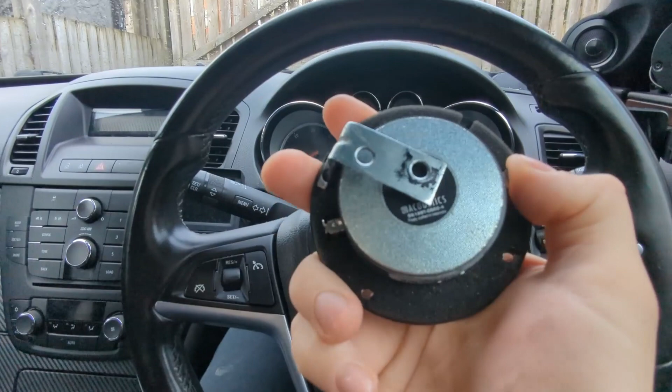What I want to do with this - this is a typical home audio tweeter. It's an SB Acoustics, the SB19. This tweeter costs about 15, 20, 25 pounds. It's a super cheap tweeter, but it's good. According to the data sheet, the response on axis directly goes all the way up to 30K. It goes up to 20K flat, and after 20 kind of drops a little bit.

When I did these measurements of the Alpine status tweeters, and I'm going to show you probably in the response, that they drop off as if they would have a 17K low pass filter.

And the purpose of this experiment is I'm going to install them like this, just temporary. So this is just literally with brackets into the window bolt, and I'm going to have exactly the same for the other side. I just need to remove that little triangle and put it there.

And the purpose of this is - I know that my hearing goes up to like 17K or something. Above that, I don't hear much. However, I want to see if there would be a difference if I would have that top end extension.

So I will let the status drivers play as high as they play, and I'm gonna cross these probably at something like 17K. It is extremely high, 17K up to wherever they measure, probably 20, 25K or whatever. And for me it's just to see if I can hear the difference with the extended top end that is above like 17K, or I won't be able to tell the difference while playing music.

That's a bit dark, so that's the response, and you can see it has all the extension up to 20K because this microphone measures only up to 20K. I would need to get an XLR microphone if you want to measure higher.

So this is the left one, and this is the right one, which is here. So you can see everything is fine. I think on the right one, this dip might be a reflection from the glass that's coming there. Maybe, but it doesn't really matter. So let me remove the status.

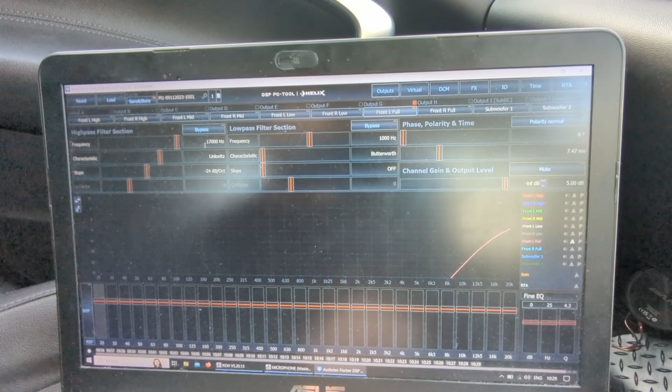Okay, so these are SB, and both of them play all the way up to 20K. The level drops a bit, but it's fine. When I cross them, where did I cross them? I crossed them at 17K, here, 17,000 hertz. When you cross them like this, you get left and right.

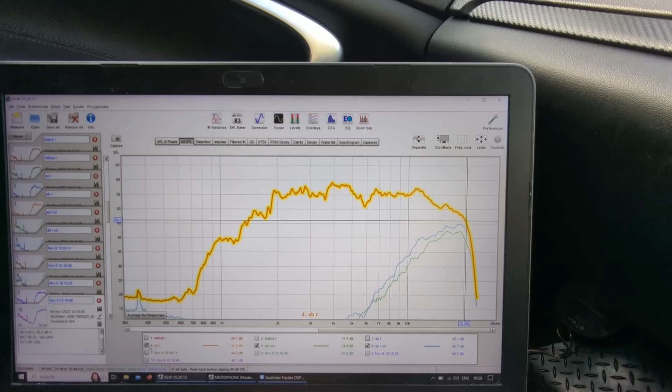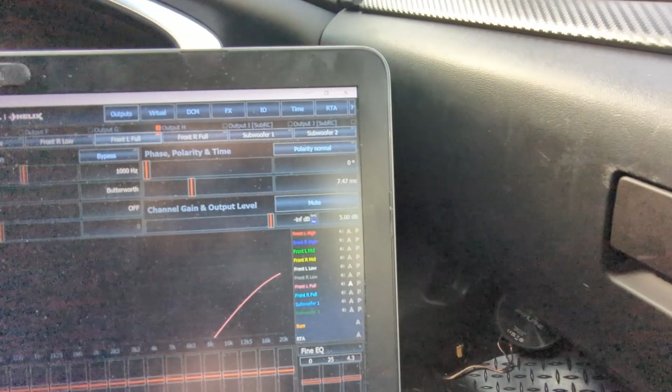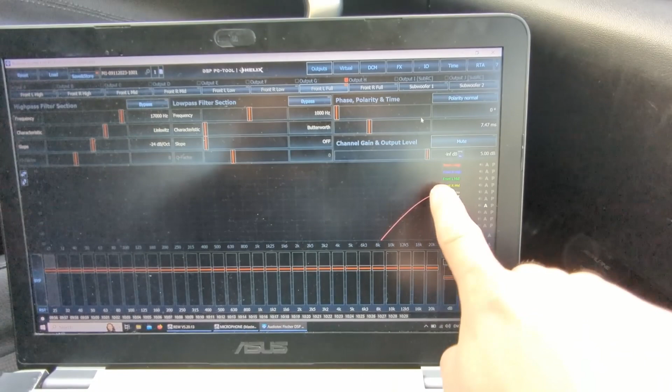So now obviously the level is a bit too low, so I had to boost the level, and I did left and right. So this is with the boosted levels. Here you can see one I boosted 5 dB and the other one something. So even with these massive 5 dB boosts, it's still fine because it's very high frequencies, and the crossover cuts a lot of energy anyway, so it's not a problem at all, and it's just for testing anyway.

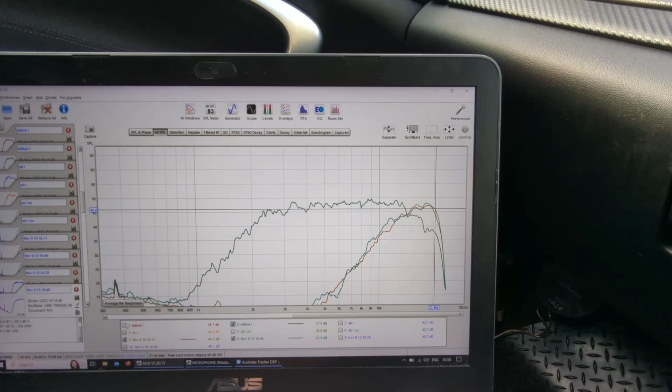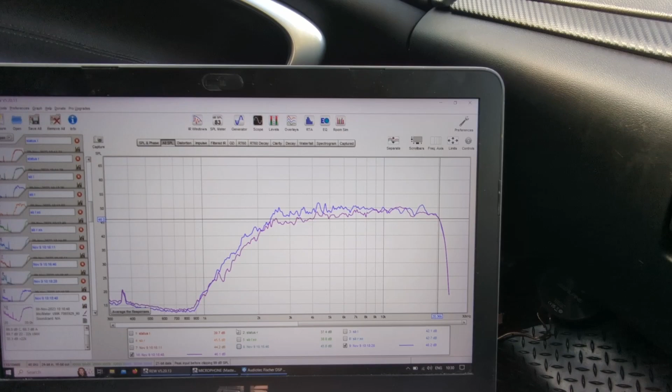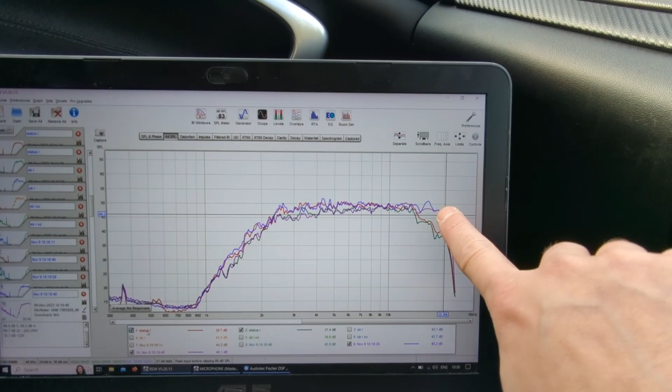And I ended up with this, so the left and right, and now status left and right. So it was like this, and basically I filled up the top end, and when they sum after the time alignment left, and I lost my mouse, right, there we go. So basically I have all the way up to 20K. Before I had this, they were falling off, and now I have it all the way up. This is a little bit of a peak, but it doesn't really matter. But basically, measurement wise, I have all the way up to 20K.

Now the question is, what did I hear, and did I hear a big difference? No.

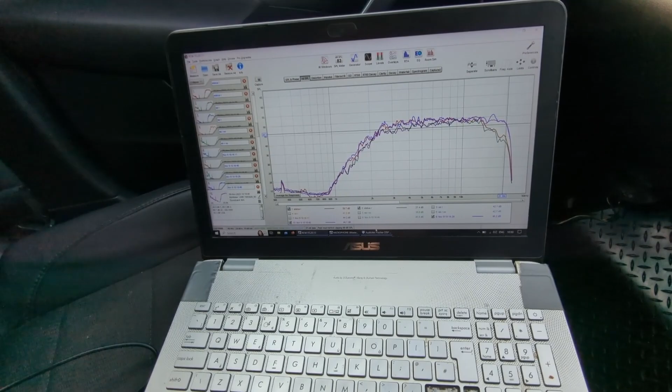Basically on music, while music was playing, let me show you how I toggle them. If you go to Helix, the Helix DSP has a very cool software. You have all these channels, and these channels are represented here.

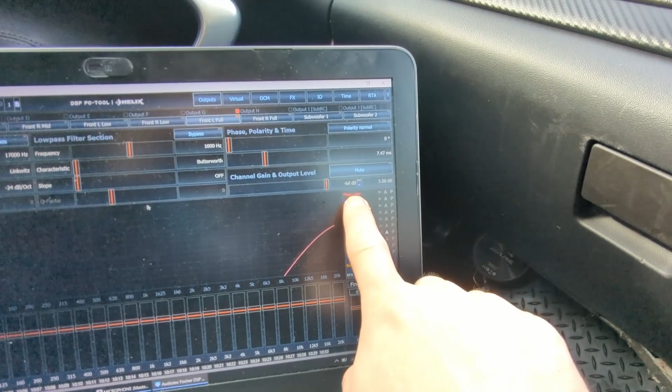For me, the channels were 7 and 8. And if I press the number 7, it doesn't mute now, there we go, 7. This one 7, sorry, not the F, but these 7 and 8. So 7, let me remove it. 7, see, mute, unmute, 8, mute, unmute. And if I press them together, 7 and 8 mute, 7 and 8 unmute, mute, unmute.

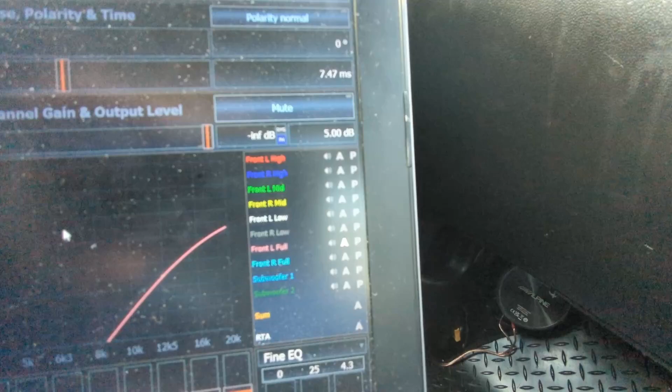So basically, this is how I was checking. I was basically playing music and just clicking those two, mute and unmute, closing my eyes and everything like that. And on music, I personally didn't hear a difference.

The only difference that I was able to hear— this is not my cat, this is my neighbor's cat.

The only difference I was able to hear is while playing pink noise and white noise. Then the difference is substantial and is good.

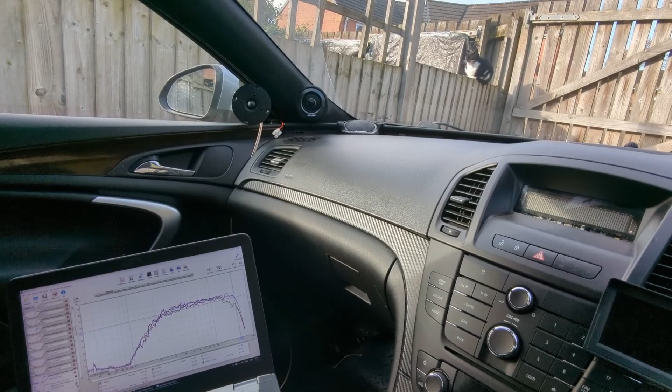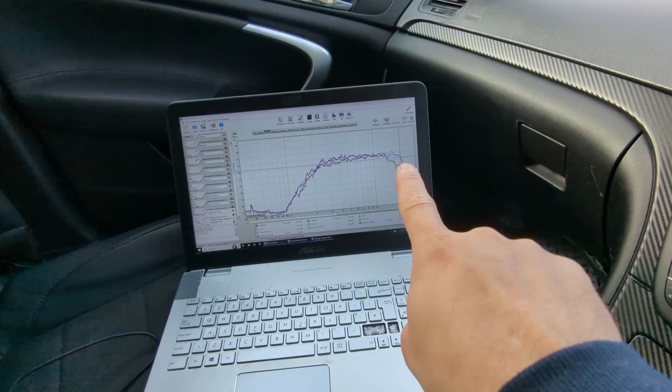But I did hear a difference playing pink noise and white noise. But me personally, with my ears and with my system, I didn't hear a difference on music.

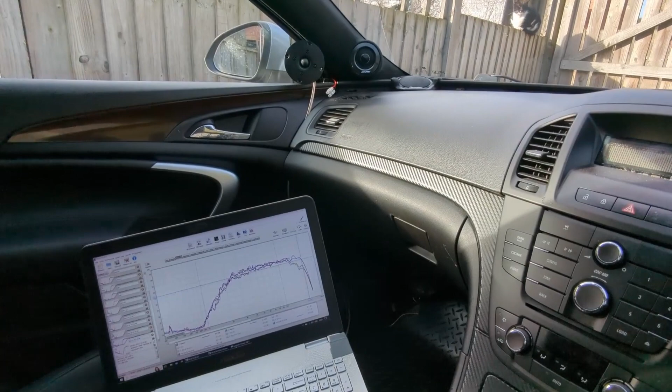Now, maybe if you play something with extremely a lot of high frequency content and you were really concentrated, maybe you would be able to hear it, but I don't know. I didn't hear anything. So yeah, it was a fun experiment, fun to test, but now I know that this drop off at the higher frequencies, for me personally, in my system, is not a problem at all.

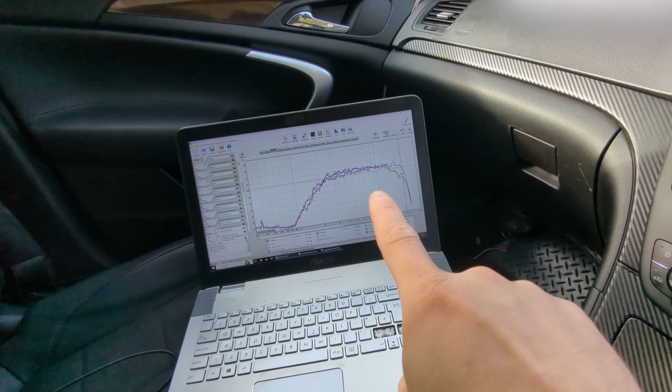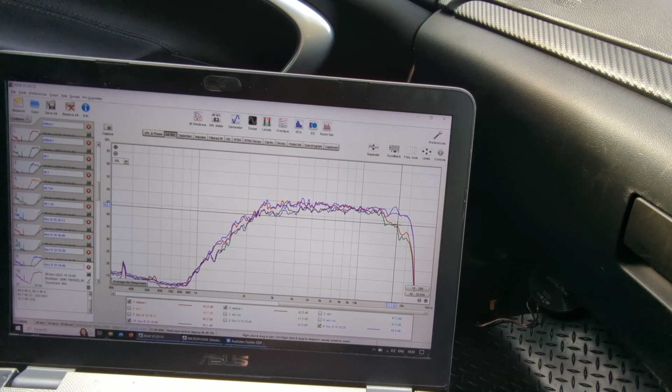I don't need any super tweeters. Maybe if they would be off axis and falling off around 10K, then yes, I would be able to hear a difference. But now, even if you take the higher frequencies, like here we have 17K—that's the upper limit of my hearing. And the difference is like what, 5 dB difference between this level and this. So 5 dB less, you can still hear it, it's just not as loud.